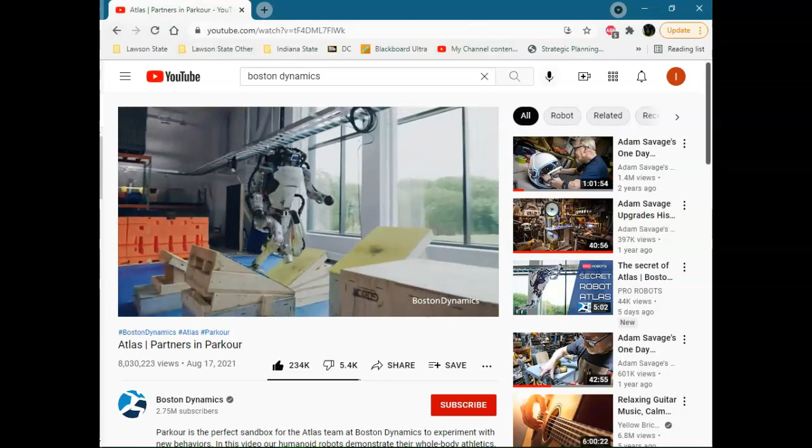Alright. They tell you quite a bit about this little robot, as they go.

So like I said, I want that in your words, not somebody else's. The only person that'll be reading any of it is me anyway, so don't be shy.

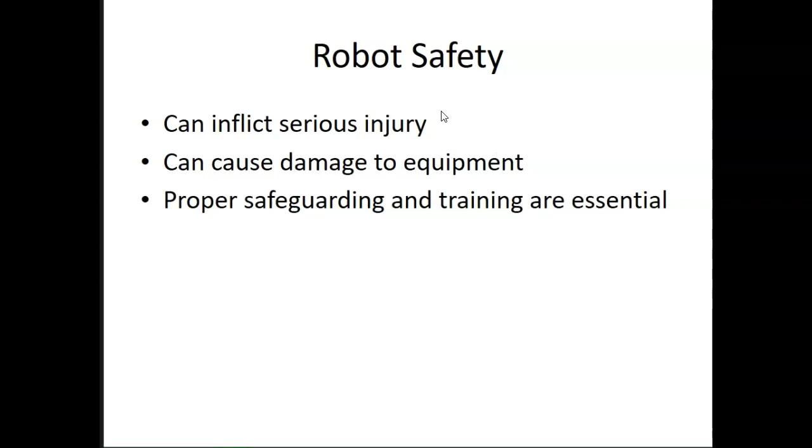Because I've used pallet jacks for years, I've always thought you're supposed to go all the way through. I had somebody tell me one time, no, you're supposed to only go halfway. At the same time, if you got heavy product on that sucker, that's just going to end up tipping everything over. It always depends on who you talk to, what the rules are.

But the biggest and most basic rules are determined by, this particular one, ANSI, the American National Standards Institute, and the Robotic Industries Association. These are providing requirements for industrial robot manufacturers, remanufacture and rebuilds, installation, integration, safeguarding, and making sure that everybody follows the right thing they need to do. In other words, they're the ones that make sure you understand you have to put this sucker away so that it can't get anybody. Does that make sense?

I will go ahead and tell you now, the only reason safety rules ever changed, does anybody know why? The most general rule of thumb, safety rules don't change until somebody is either hurt or killed. And then all of a sudden they go, oh, we need a safety rule for that.

The person was climbing on the outside of the play equipment. Why should that need a safety rule? Y'all remember all that kind of stuff as a kid, right? They say, don't climb on the outside of this, don't climb up this. And you sit there and go, okay, why?

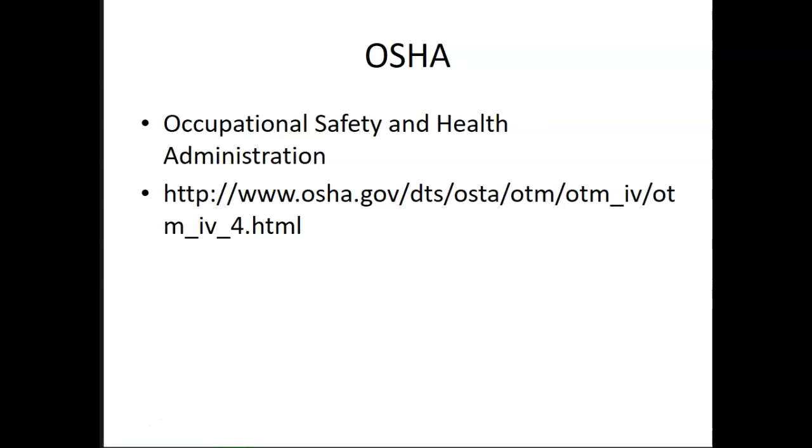So before they ever install a robot, they have to do what's called a risk assessment. This is where they have to look at what is the robot going to have to do as the task, where is it going to be. Because location is everything. Are you going to stick this sucker in a corner, or is it going to be out in the middle of the floor where it's got to be?

You need to know what kind of programming procedures you have to deal with, the normal mode of operation, malfunctions and corrective actions, and stored energy hazards. What does it mean by stored energy hazards?

Yes and no. Okay, so stored energy. How many of y'all have ever worked with hydraulics or pneumatics? A few of y'all. They tend to store energy, right? Even when you turn them off, they still have that pressure unless you drain the lines.

So if you're the person that has to go up to the robot, one of the things you want to do is, A, turn off the air, but B, you want to drain the line. Why? Because that gets rid of any potential for you when you start messing with that gripper, or you start messing with anything that's got pneumatics or hydraulics or electrical, or even something mechanical like a spring. You want to get rid of those stored energy hazards, because otherwise it might come back and bite you, right?

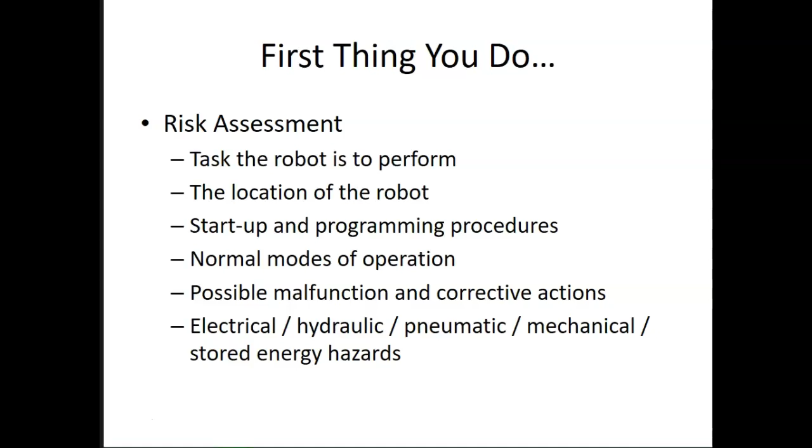Most accidents are caused by programming, testing, inspection, and repair. Most accidents occur because most people are not paying attention. They're busy thinking about the weekend, either the one that they just finished or the one that is coming up, right?

Where should your brain be? Where should your mind be holding to? Doing exactly what you need to do to keep yourself and those around you safe. That is where your head needs to be at all times. Because the second that you don't hold that in mind is going to be when you end up hurt. I'll tell you that now.

Programming happens because you get into a case with the robot where you've got to mess with some of the parts of the programming, and get touched up in different places. You're not paying attention and the robot is still running full speed. Most of the time, if you're trying to mess with that program, slow it down. It might take longer to get from point A to point B, but it means that if you get caught in a pinch point or caught under the robot by accident, you don't end up hurting yourself or others.

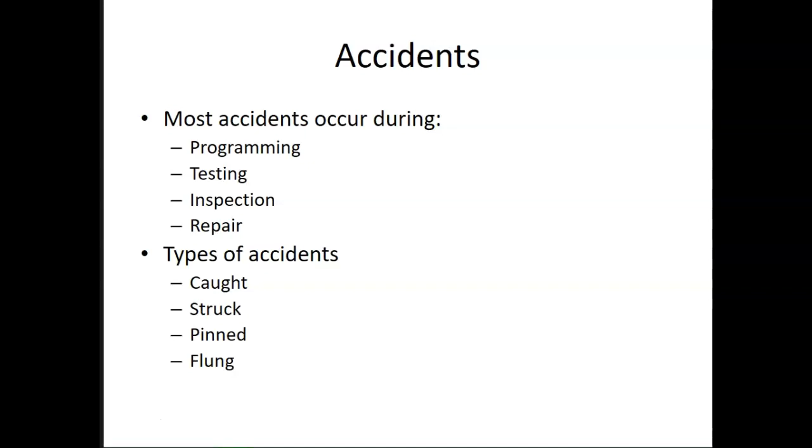One of the most common things we use to keep people away from the robot is a fixed barrier or fence. Why a fence? Well, it makes it that much harder for people to get up to it, right? We make sure that you cannot really go over it, we make sure you can't get under it, and you don't want to be able to get around it.

So basically we try to make a barrier that is not easily passed, because we are trying to keep everybody out of the robot's workspace, right? It should not be easily bypassed by any means.

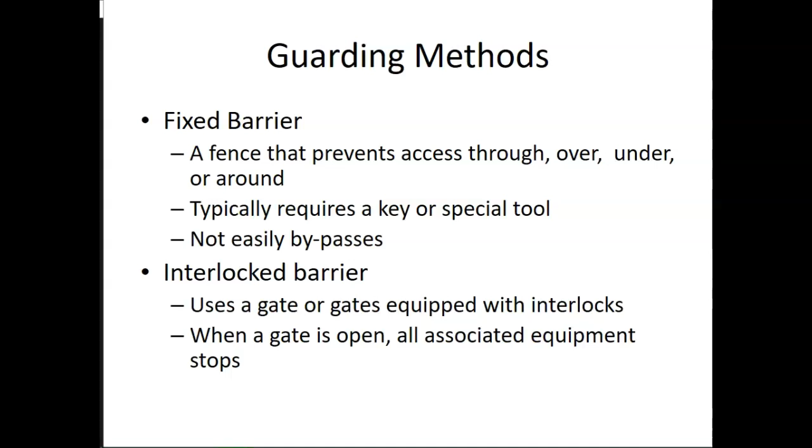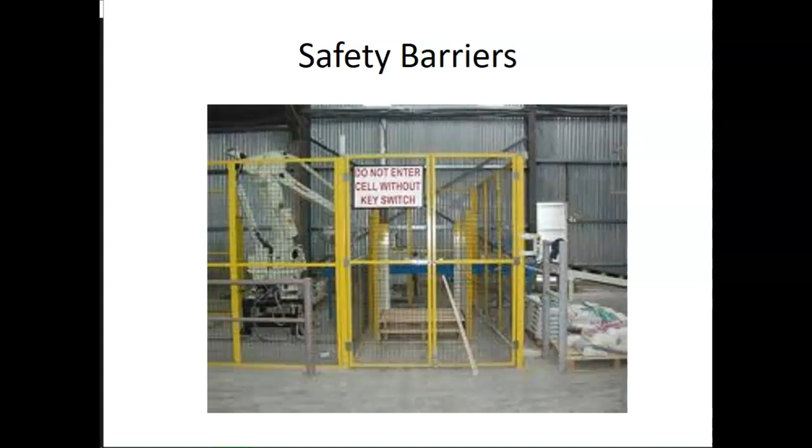Some of the other guarding methods we use very liberally — pressure mats, not mates, pressure mats. If you don't know what a pressure mat is, if you walk up to automatic doors, some of them use pressure mats instead of motion sensors to let everybody know that you're there, so they can let you in.

Light curtains are very common. Anybody know what a light curtain is? For those who don't, think Mission Impossible with all the light beams going everywhere, only one side is pushing the light beams and the other side is receiving them. If you go through those and break one of those beams, all production stops, or it will not start up until you leave that area. Does that make sense?

So we're looking to detect the entrance of a person into a hazardous area. Emergency braking brakes the motion of the robot instead of completely removing power.

You have awareness devices that can define a safe perimeter, and you can use warning systems, but they cannot be used alone. Why? Because you want to make sure somebody somewhere is aware that there's somebody trying to mess with the robot. You're not supposed to be in the area with the robot whenever you start it.

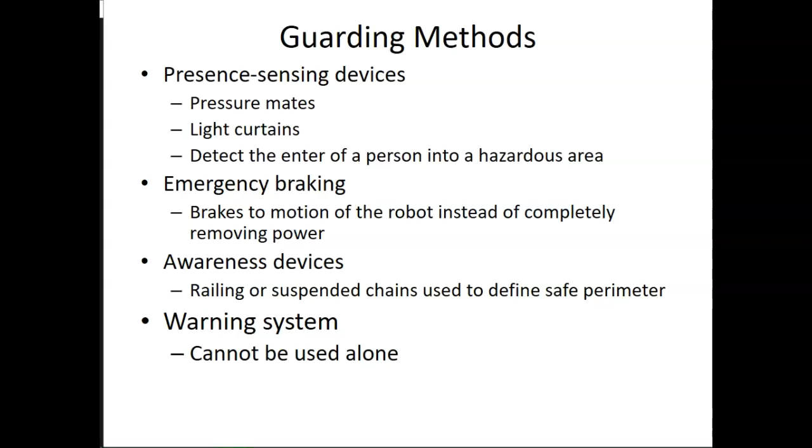You cannot force light to show itself, right? Not unless you're dealing with the dark. So this is a way for them to say, hey, there's somebody in the area that doesn't need to be there. Unauthorized personnel are not permitted.

Now, I will go ahead and tell you this: most of the time, these robots are carrying heavy payloads. Now, what does that mean to me? That means if you start slamming that emergency brake, what's going to happen if you have a heavy payload on this robot? Think 18-wheeler slamming the brakes.

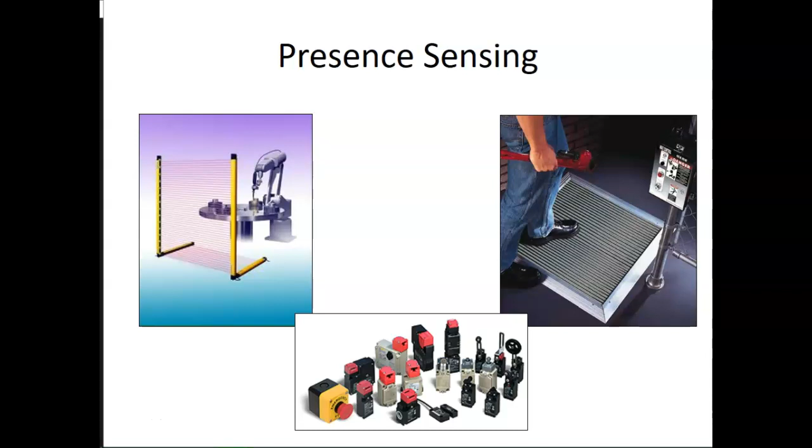Any and all robotic setups—just like anything, it's always situational. And if the situation calls for the robot to be on the floor where humans and it are interacting closely, then you're probably going to end up having more safeguards than if you have it put away.

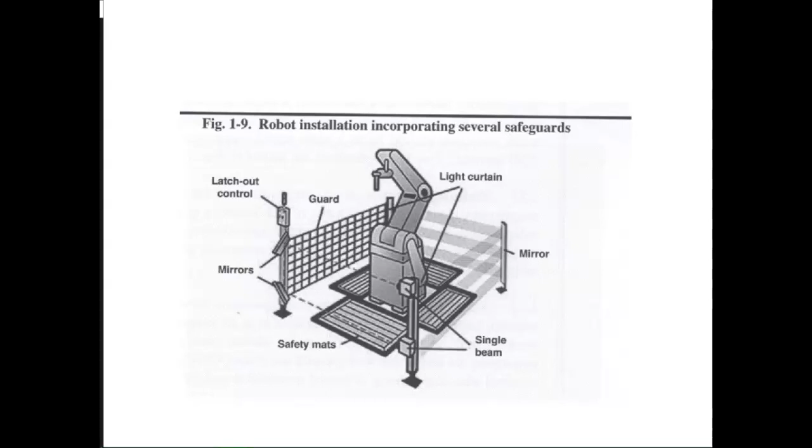So control devices—these must be located outside of the work envelope. Now, what do we mean by work envelope? The other word for it is workspace. That's the more common term for it. I need to probably go in and change that. So what do we mean by workspace?

Well, a robot—does it have the ability to get up and move? Can it just jump up and go to the side to wander around? No, it's bolted to the floor. So its workspace is anything it can reach within its area. Does that make sense?

Control devices, like the controller for the robot, we do not put that in the cage with the robot. Why? Because if the robot goes haywire, spins around, and hits that, it basically destroys its own brain. It's kind of expensive to replace.

It must be in sight of the robot. So if I'm running that robot, I need to be able to go to that control device and still see what the robot's doing, and make it stop or slow down. I need to be able to visually see that robot.

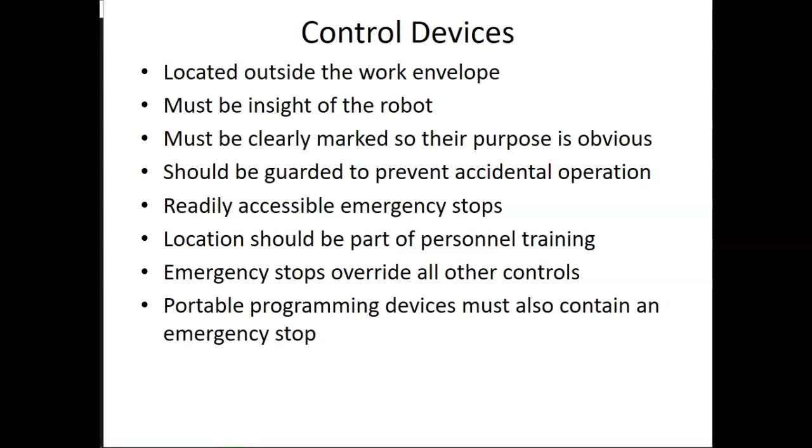For installation, there are certain safety codes with these robots. The thing is, a lot of robots are fairly good sized, and if you don't follow the safety codes, you risk them tipping over and ending up on the floor.

I wish I actually had the Fanuc up and running. Right now he's got a bad joint that we're getting fixed. But the thing about that Fanuc is, you can actually see whenever he's in full motion, he moves his cage. I've seen him move his cage so hard he actually bumps it off the wall and moves it forward into the room. These things are powerful, and when they start slinging their weight around, it's quite something to witness.

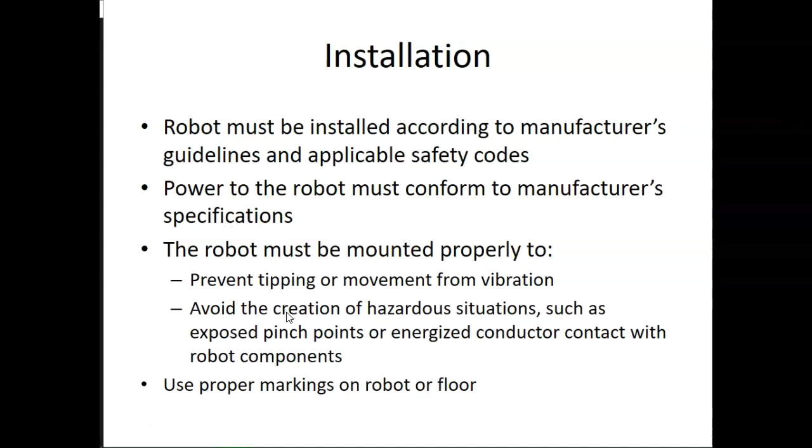Follow the manufacturer's preventative maintenance schedule. That's always a good idea. What is that preventative maintenance schedule supposed to do? Exactly what it sounds like - it's supposed to prevent the robot or whatever mechanical equipment you have from breaking down.

To do all that, you need to make sure you're doing what? Before you ever go near something that's powered, what should you do? Cut the power - not just cut the power, but lockout, tagout, right? I don't care what stored energy you're using - hydraulics, pneumatics, electrical, mechanical. If it has some way that needs to be de-energized, you lock out, tag out. And why is that such a big safety thing?

Because it would really, really be terrible if somebody came and turned that on while you've got your hands in it. It's kind of like somebody working on equipment around your house and you don't know they're working on it at that time. Let's say they're working on the sink, you don't notice, and you just come in and start running water. All of a sudden you've got water everywhere in your house. That's why you lock out, tag out.

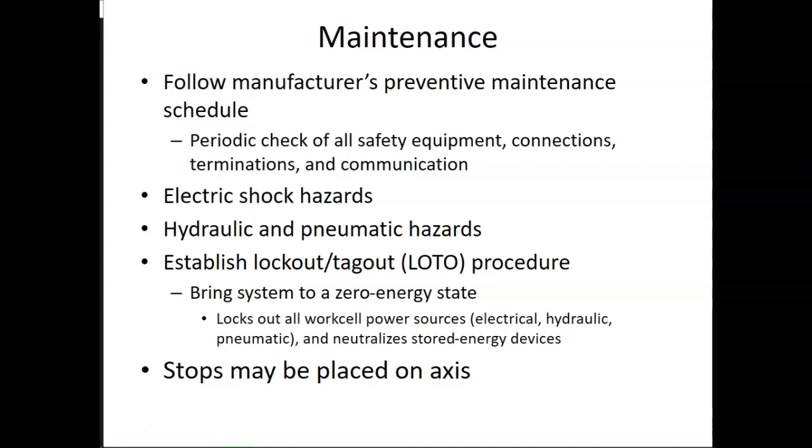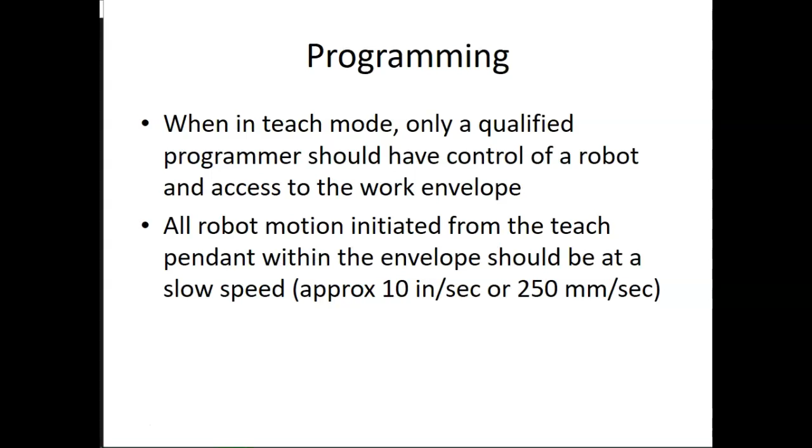So for programming, when in teach mode, only a qualified programmer should be controlling the robot, and everything should be at a slow speed. Again, that's just so that when that robot starts moving, you're able to get out of its way.

The biggest preventative of most accidents is training, believe it or not. That's why companies spend lots of money every year training their employees to make sure they don't put themselves in hazardous positions. Why? Because it's easier to train them not to get into those positions in the first place than to pay for wrongful injury or workman's comp.

So effective safety programs must be included in the training. All employees should be made aware of the hazards that exist and the safeguarding measures in place. What are the safe practices necessary for you to perform your job? Most jobs do this, right? Or they're supposed to.

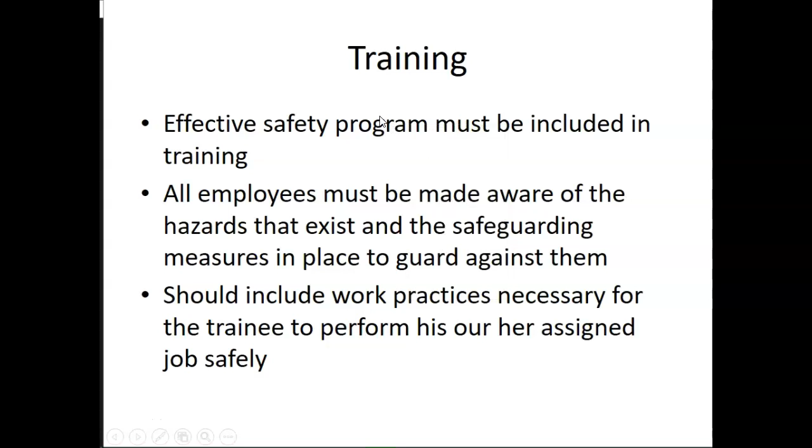So every company should have a safety policy written somewhere, and that includes for robotics. Because do they have time to sit there and go through every safety policy, procedure, and rule? No. But what do they generally do? They give you a manual and say, here, happy reading.

Technically, they have given you the material, and it's up to you to read it and understand it. Because as long as they give you that material, they are legally safe. They can sit there and say, well, I have provided them with these. What happens after that is not my fault.

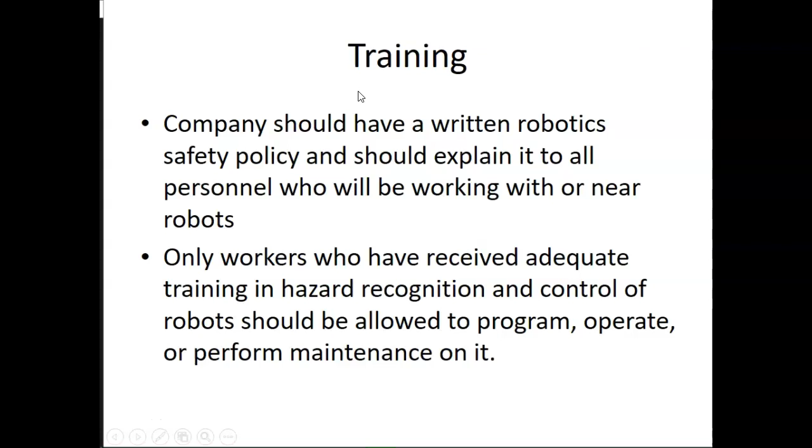So only workers who have received adequate training in hazard recognition and control of the robots should be allowed to program, operate, or work around it.

So again, we're looking at the word envelope, but change envelope to workspace, and it means the same thing. So basically, if you bolt this chair to the floor, what is your workspace? What would be your workspace if your chair was bolted to the floor? Anything you can reach, right? As long as you do not move from where you're sitting, it's everywhere you can reach within that area, correct?

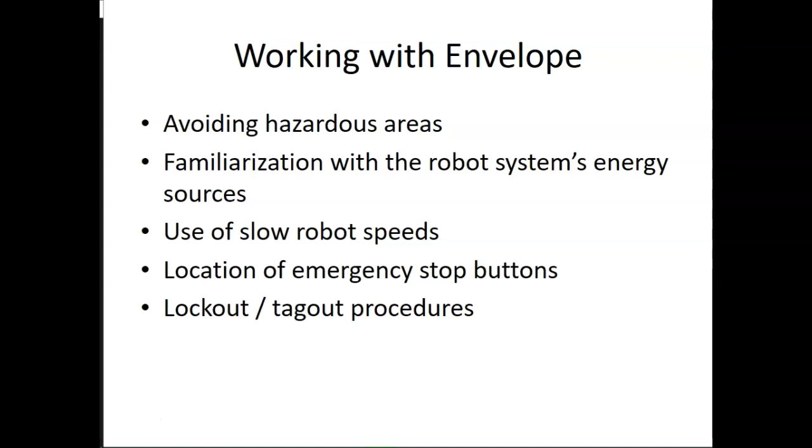Same thing goes for a robot. So one of the things you have to do is be very careful when you're getting in his space. Why? Because he does not like people in his space to begin with, so you got to make sure that you don't get too close to a bad situation.

So I will tell you this. We actually, with this robot here, the ABB, we had a camera that somebody ended up destroying. So if you see the little black box that's around the camera up there now, there's a reason for that, so somebody can't just knock that off.

Most robots are very expensive, talking thousands of dollars in investment. And that's not always including that vision system. How much do vision systems cost? What do y'all think, round ballpark figure? A couple hundred? Maybe even a lot, somewhere close to 1,000, depending upon the sophistication of it and everything that's got to go with it, right?

So when it comes to the robot, you have to make sure that when you are working with it, you have the understanding that you're dealing with a very expensive piece of equipment. And not just very expensive, but it's a precision-driven piece of equipment. Now, what do I mean by precision-driven? Exactly what it sounds like.

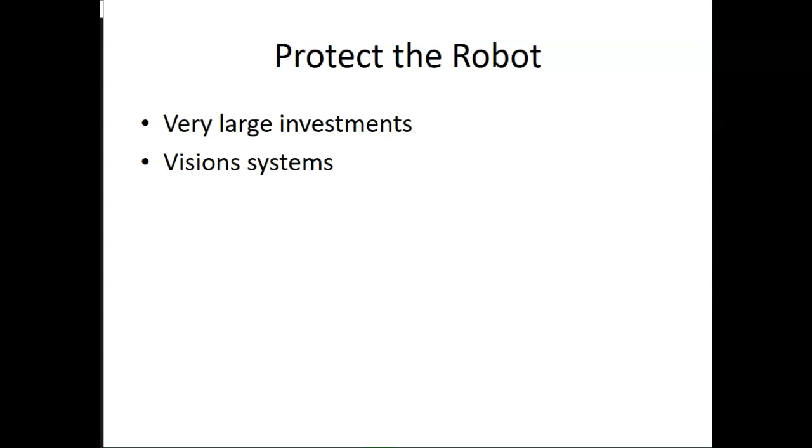All right, I think we've gotten through most of this. Yep, so that's the whole first chapter of robotics, guys. So, what time does this class get out? Get out at 11, right? All right.

And let's move on to chapter 2. Yes. Wednesday. Is it imperative that you leave? Then...